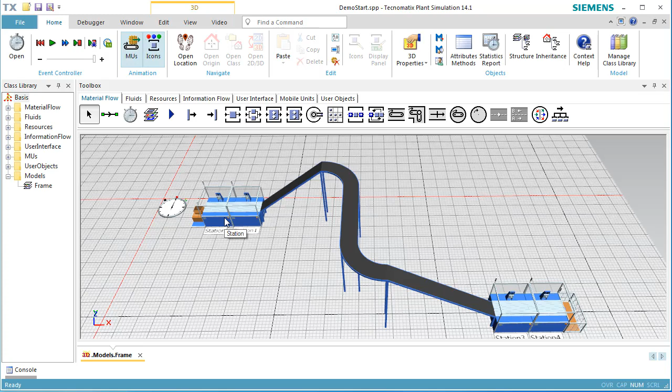In this video, we want to demonstrate how to work with workers in 3D. In our videos, Modeling with Workers and Worker Carrying Parts Between Workplaces, we have already shown how you can use workers in Plant Simulation. Now we are going to use the model which we created in the video 3D Length-Oriented Objects. To get started, begin Plant Simulation and load the model file. Click Load Last Model or click Recent Models and look for the model.

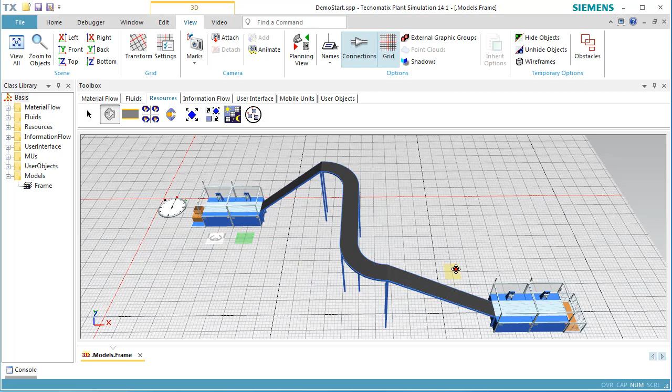First, we add workplaces to the stations. Click the workplace on the tab Resources in the toolbox while holding down the Control key. Move the mouse to the position where you want to insert the workplace. Click the left mouse button to insert a workplace below the objects Station, Station 1, Station 3, and Station 4.

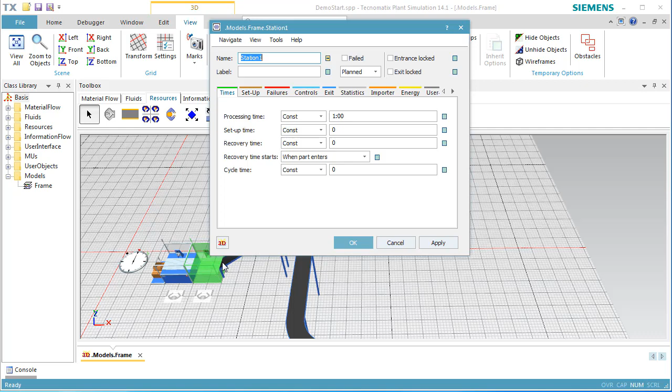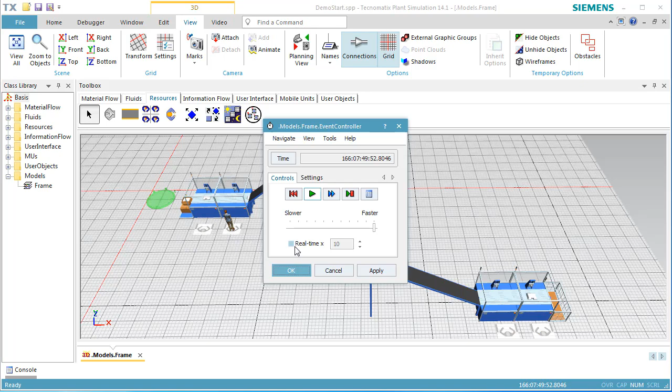Next, we add a broker and a worker pool to our model. Double-click the station to open its dialog. Change to the tab Importer and select Active to activate the importer. We do the same for Station 1, Station 3, and Station 4. When we run the simulation, we see that the worker is walking unrestricted between the stations, meaning that he is not bound to footpaths, selecting the shortest route between them.

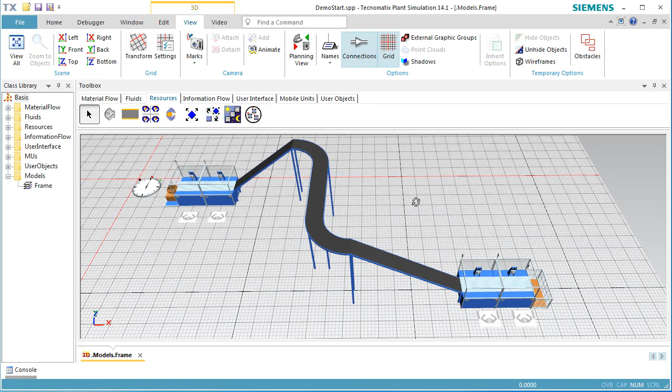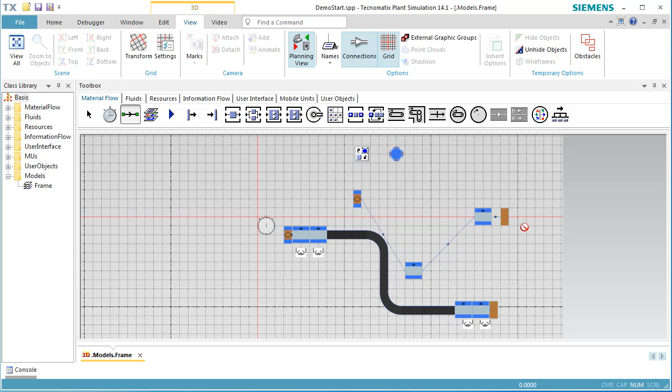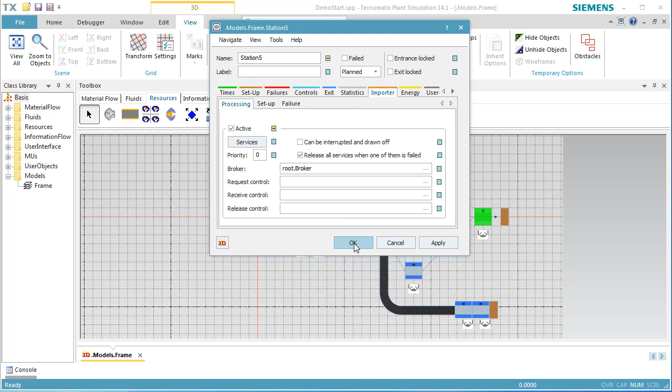Now, we want to add 2 more stations to our simulation model. To make inserting the objects easier, we switch to Planning View on the View ribbon tab. Then, we insert a source, 2 stations, namely Station 2 and Station 5, and a drain. We add a workplace to both stations and we activate the importer for both. Now, we can switch off Planning View.

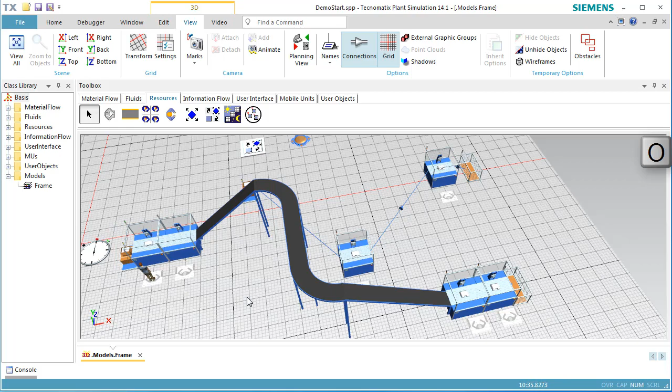When we reset and start the simulation, we see that the worker is walking all the way around the conveyor to find his way to Station 2 and Station 5. To visualize the obstacles around which the worker has to walk, we press the O key on the keyboard. Then, Plant Simulation shows a red bounding box around each object. The distance between the material flow object and the bounding box is 0.4 meters.

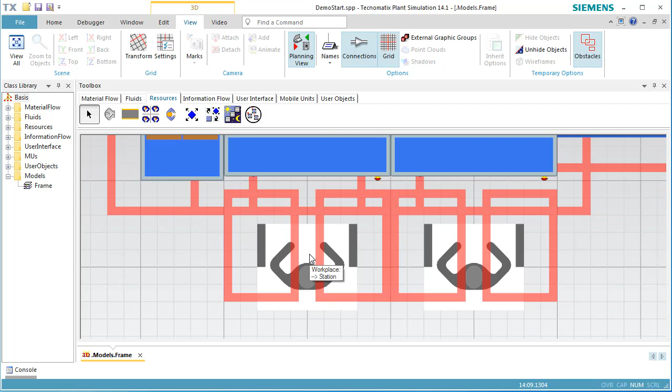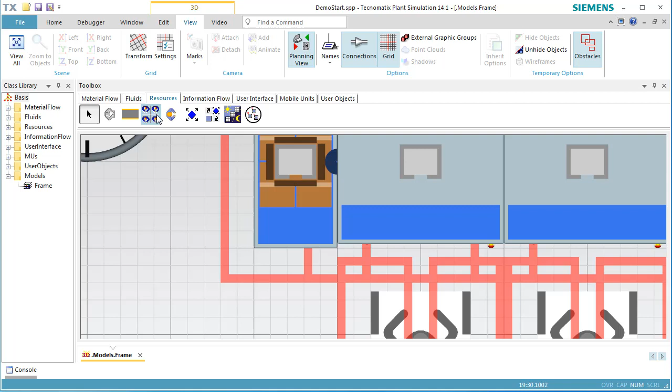When we look at the workplaces, we see that they show 2 bounding boxes with a gap in the middle. This ensures that the worker only moves to the middle of the workplace, and that the worker first has to leave the workplace before he can change his walking direction towards the next target object. We also see that information flow objects are no obstacles for the worker, as they do not represent physical objects that he has to circumvent. Note that the obstacle of the object line is a rough approximation of the curved line.

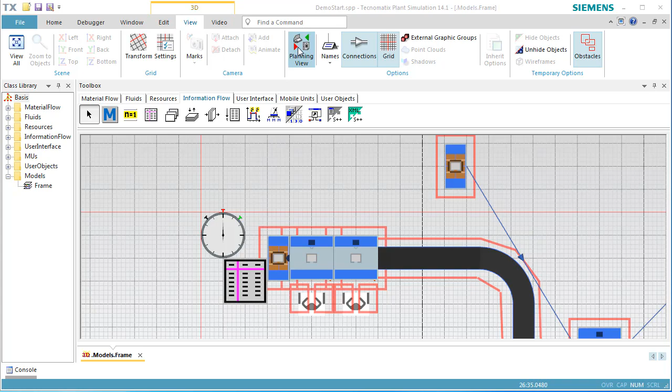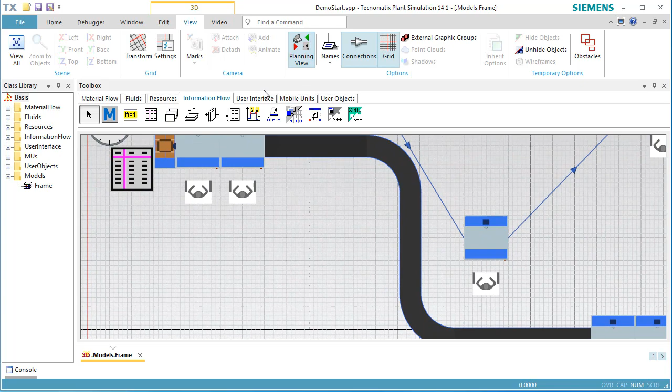The line object is high enough to allow the worker to walk under it. The obstacle prevents this though. To allow the worker to walk under the line, we have to insert a footpath. Select Footpath on the tab Resources in the toolbox. We insert the footpath so that it starts and ends outside of the obstacle of the line. This allows the worker to walk under the line using the footpath.

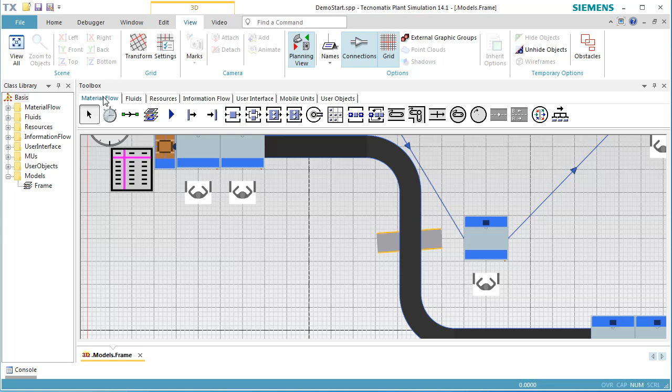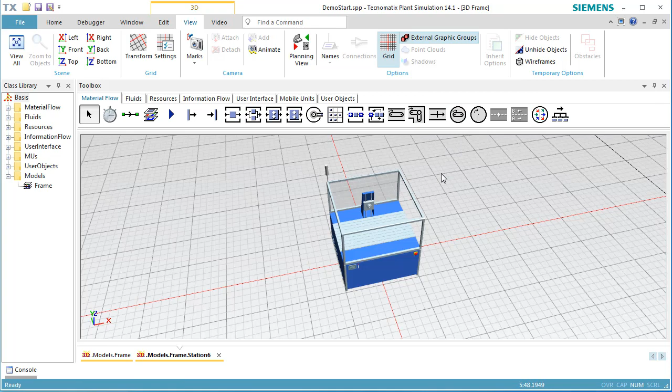Next, we are going to insert another station directly in front of the footpath. The worker then has to walk around the station. Select the station, click the right mouse button, and select Open in New 3D Window. We delete the graphic of the station.

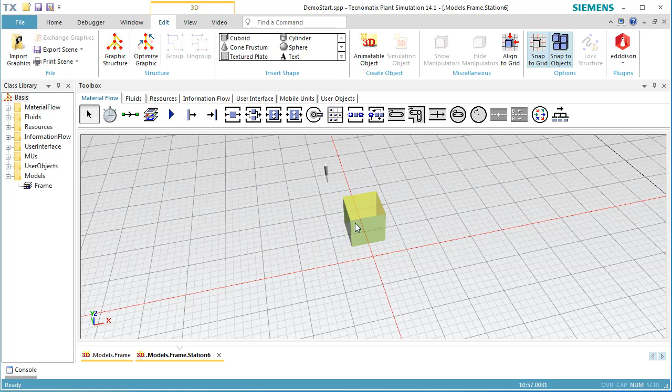Then we select Cuboid on the ribbon tab Edit and insert 2 cuboids with the dimension of 1 meter for all directions. This station has the bounding box of both cuboids as obstacle. In the simulation model, you can see the worker walking around the station.

We open the dialog Edit 3D Properties of the station. On the tab Graphics, we can define the obstacle for the worker. The bounding box defines the obstacle as the bounding box around all graphical elements. We select Graphics. Then each individual graphic element of the station is defined as an obstacle for the worker.

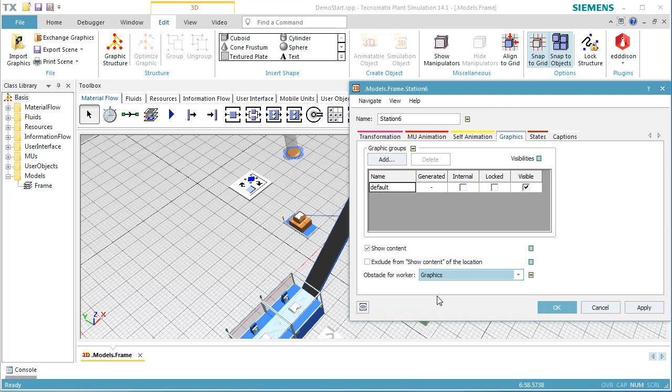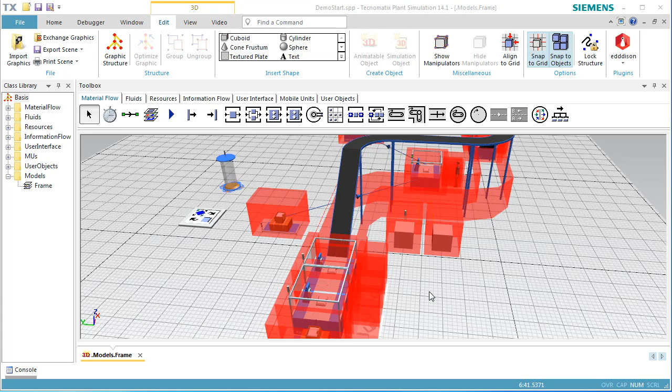Now, we see a small gap between the obstacles of the station. This enables the worker to pass through the components of the station. As soon as there is a small gap between 2 obstacles, the worker can use the path.

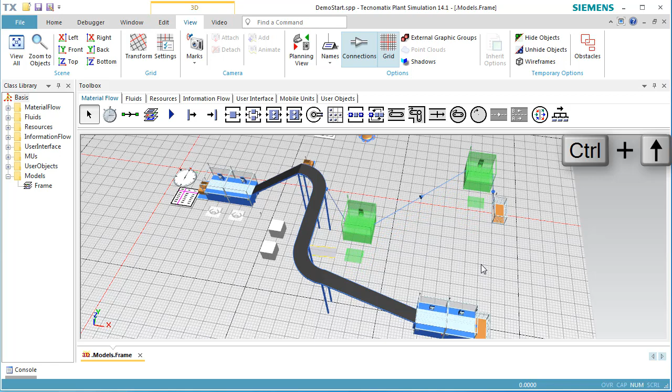Next, we want our stations to be located at different heights. To achieve this, we select the objects which we want to move to a higher level by dragging a marquee around them. We hold down the Control key and move the objects up with the mouse or with the arrow keys on the keyboard. If you want to use a precise value for the height of the station, open the dialog Edit 3D Properties and enter a value for the Z position.

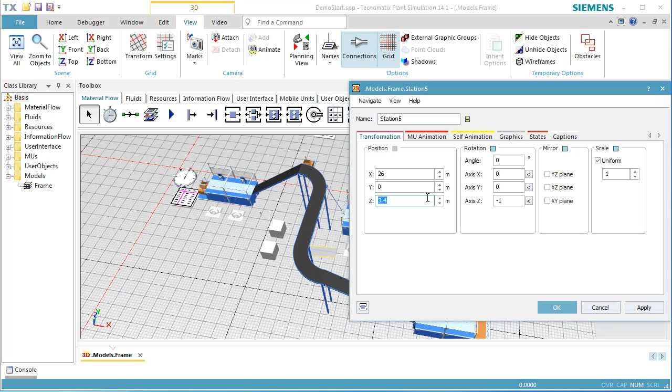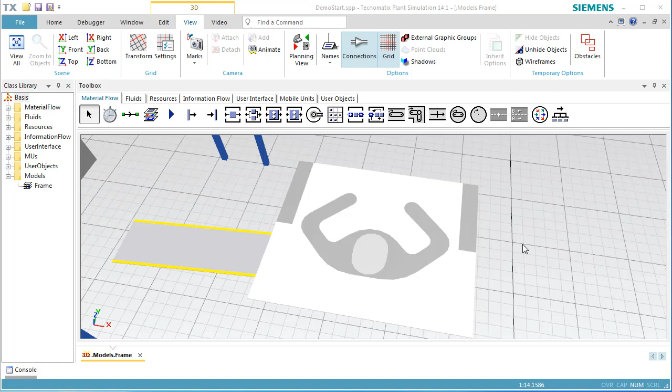As a consequence, the worker now cannot reach the workplaces which are located at a height of 3.4 meters. To make the workplaces reachable for the worker, we have to add a staircase. Click the Edit ribbon tab. We expand the group Insert Shape and select Stairs.